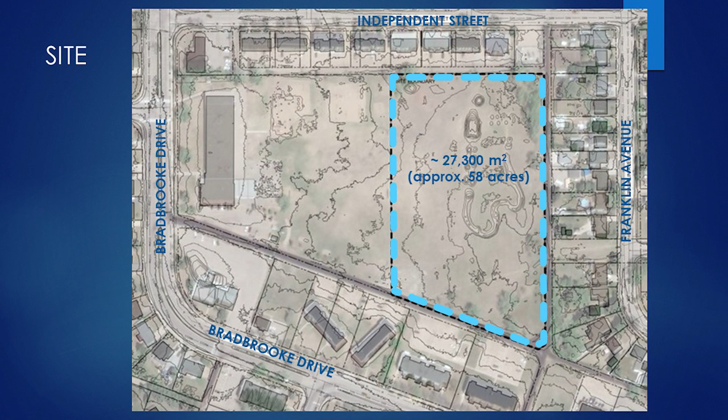So there's a nice little overlap. We don't have street frontage. The only kind of park connection is this in here, which is a municipal utility easement. And so you'll see how the concept plan takes advantage of that.

So just in terms of our timeline and where we're at, we started in May. And with a bit of a conversation, then we were able to visit the site and had the first stakeholder engagement session at that time. And that really engaged the basketball and the pump track folks. Unfortunately, the basketball people were more available at that time than the pump track. But as you'll see later when we talk about some of the survey results, it seems like that part of the community is not as well developed as basketball.

But we then have developed a preliminary park concept plan. We are now at council presentation. We hope to have an open house this coming week, which takes our concept plan out to the public, and then doing the final concept and budget just before Christmas, and then for city approval early in January.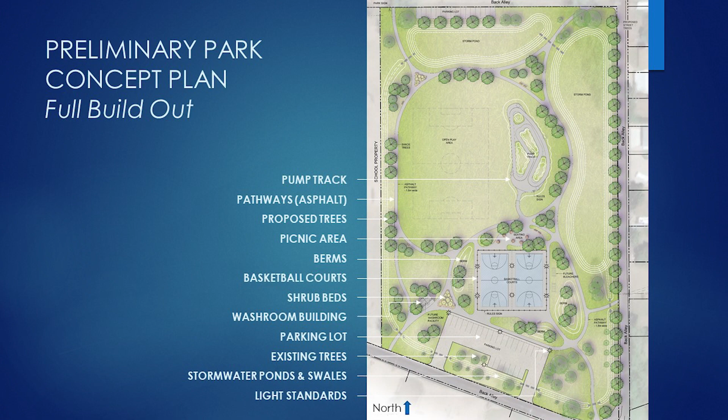So that's the full build out. This is our proposed phase 1 right now, so just going through the main features: we have the pump track, basketball courts. Basketball courts are without lighting and without fencing and without the acrylic surfacing at this point. Parking lot, the storm pond and swales are in.

And then we needed to make sure that even in the first phase, or at least this is what we want, that we have an accessible pathway to get to that pump track. So we needed to put in some amount of the pathways that were shown in the full build out.

And then some of that land formation, we will grade the park. We needed to grade the park in order to make the storm ponds work, but also just to make the future and the phase 1 pieces drain properly. So it has to be graded, and we'll do those berms at that time.

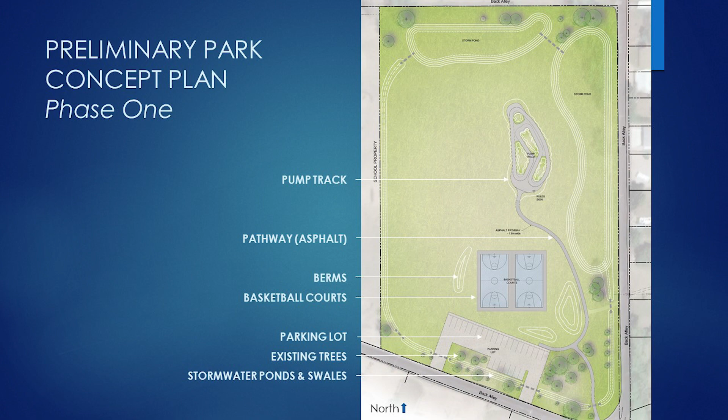And then that was just the existing trees. So I guess importantly, in phase 1 we don't have any new trees at this point. Okay, and I will give this over to Graham. Graham, you can just tell me when to advance.

Perfect, thank you Lorraine. So as Lorraine alluded to, we had done some community engagement a few months ago with online surveys, as well as meetings and site selection and all that kind of stuff. And this is the track that kind of fits within the proposed budget and within the answers we received from your community members in the survey.

On skill levels, the types of riders they would be, one of the things that was called out in the survey was there was a need to kind of encompass everybody from advanced users right down to beginner users.

So this track is laid out in a way which you'll see on a 3D rendering that kind of has a double bump near the bottom of the track, which very easily allows it to be a multi choose-your-way track. That way, if you have smaller children that may come to the track, they may not be able to do the full 166 meter track length.

That gives them multiple options to come out of the track on the two different platform areas. The one on the far left is a large starting area, which allows kids to congregate and sit up there, as well as parents who may be with smaller children to help them. Then we have an exit and another platform on the far right, which allows somebody to exit the track easily if they're getting tired or wish to come out of it. They could also congregate up there.

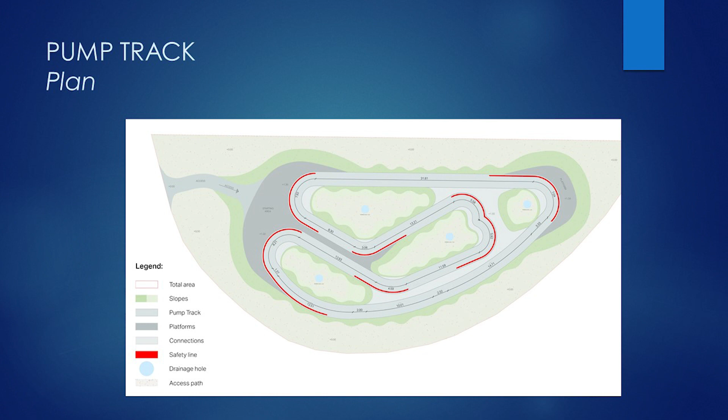Pump tracks are really cool and versatile. The same expert 23-year-old that wants to whip around it fast can double bump and come up higher in the turns and berms, while a 4 or 5-year-old on a Strider bike can also gain confidence using those same berms and bumps to practice their balance skills. It's really versatile—everybody in the community will be able to use it because it's a hard surface pump track, all wheels: skateboards, scooters, rollerblades, mountain bikes, BMX bikes, wheelchairs. I've seen guys race RC cars around it. It's very versatile and really hits a vast amount of your community, and it's built for all skill levels.

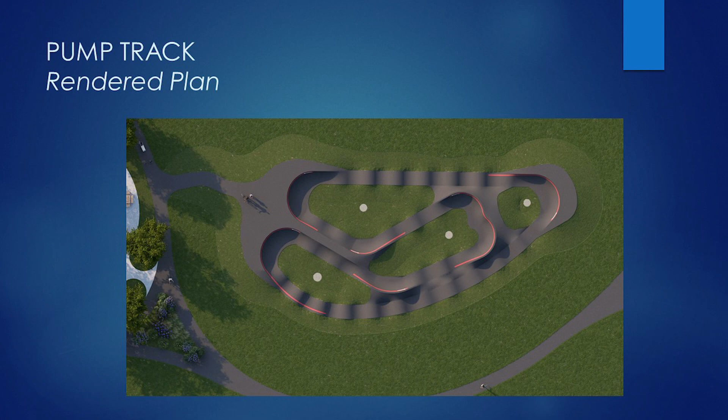This gives you another look at it, an idea of how big it is. You've got those two people standing up on the starting platform, so as you can imagine, at 166 meters, it's quite a bit of length.

This will easily keep beginners, intermediates, and advanced riders excited as they move through the track. They'll be able to do transfers as they get a little better. Super exciting to bring something like this to your community.

A lot of communities are going this route—many already have other action sports amenities like skate parks and bike parks. Pump tracks seem to be the new thing on the wish list, and it's going to be great to have something like this in Yorkton for you.

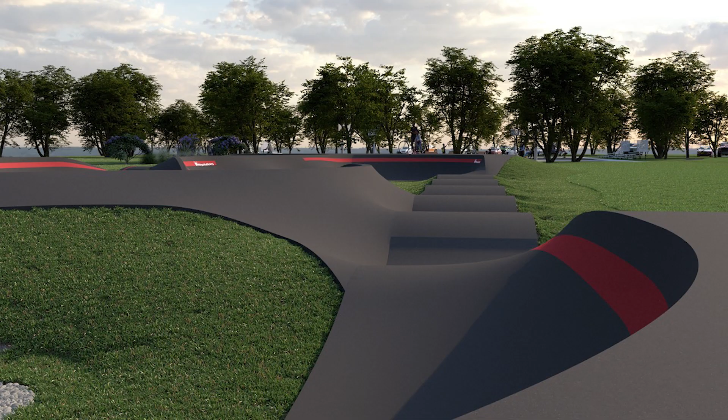Here's another view—you can see the berms and bumps all here. To answer some technical questions, the top of these berms where you see the red lines will be at about 48 inches high, roughly 4 feet. The bumps in between those big berms will sit at about 18 to 24 inches high, with the grass and everything around coming right up.

On the back of all the berms, there are slight platform situations, so at no point would there be a risk of a child flying out on a 4-foot drop or anything like that. It's engineered to be safe and easily exited if needed. We're excited about it—we got a great response from your community and tried to build something that really fit what they asked for and wanted. I hope you guys see it the same way we do.

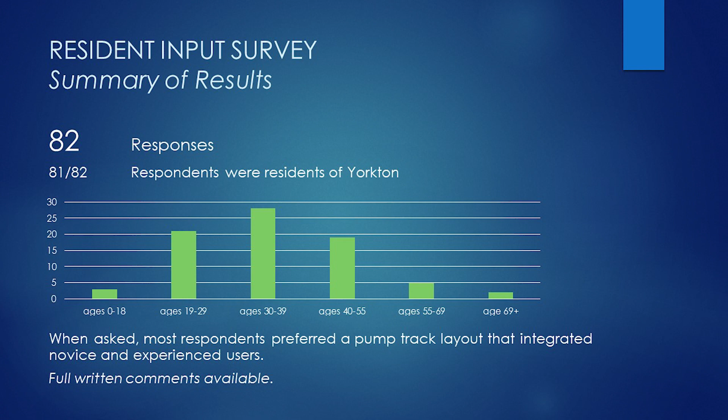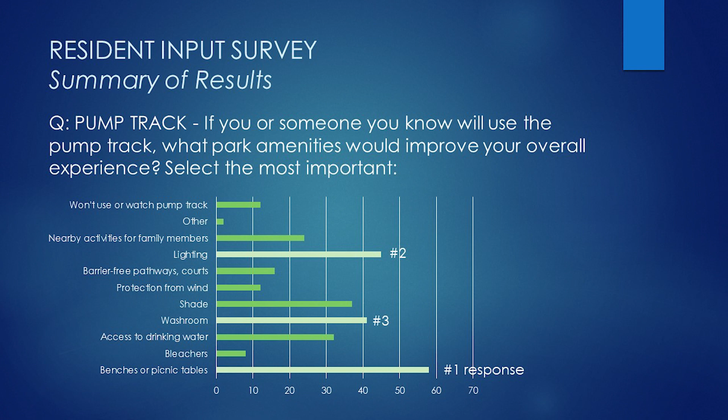If you or someone you know will use the pump track - this is a question about what would add to your experience. We gave them options including won't use or watch, nearby activities for family members, lighting, pathways, protection from wind, shade, washroom, access to drinking water, bleachers, and picnic tables or benches. The number one response was picnic tables or benches, lighting was second, and washroom facility was third. That's interesting because it was very similar when we asked about people who would use a basketball facility.

So you need to provide a well-rounded park development, and that's why we ask these questions. And that's the end of mine, because I think we need to go back to Darcy, and then we may have questions after. If you're okay, Your Worship, please do, just let Darcy finish off. Thank you.